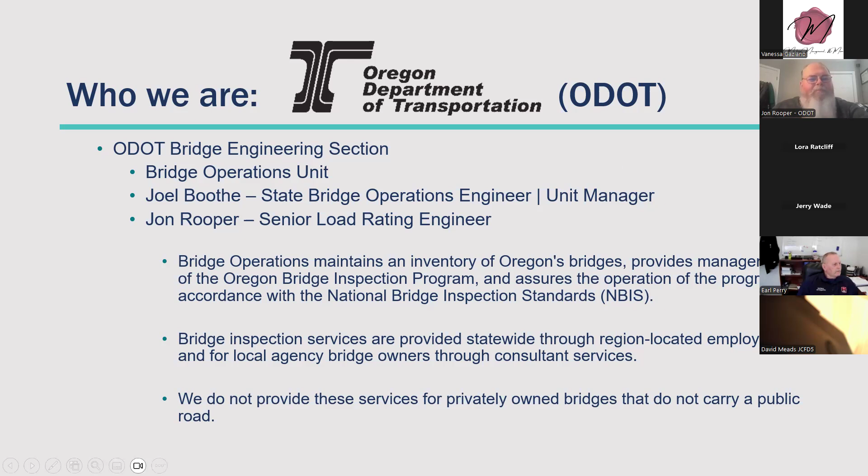So what we do is required by federal law. The National Bridge Inspection Standards are basically established for the safety inspection of highway bridges throughout the United States for all public bridges. This is basically required by the United States Code, which is the general and permanent laws of the United States. And a lot of that is prescribed in the Code of Federal Regulations, which is basically how to implement those laws and the interpretation of those laws. So a lot of what I'm giving here is basically right out of federal regulations and law.

So the first thing is, what is a bridge? That's what I'm concerned about and what we're required to look at. The legal federal definition of a bridge is law language, but the main thing that makes it what we're mandated to inspect and load rate is any structure that carries a public road and has a span length of greater than 20 feet.

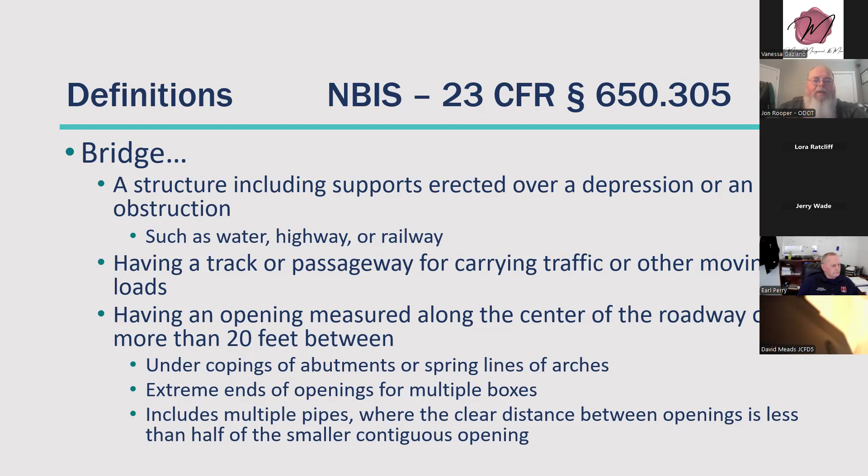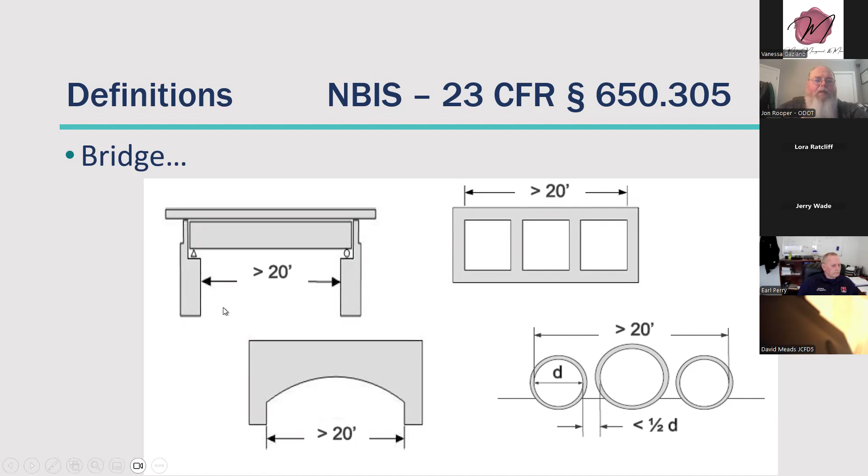To simplify this, looking at these diagrams, if you have a structure like in the upper left, if that span length is greater than 20 feet, or if it's multiple spans, if the outer edges of that structure and the clear distance of the span is greater than 20 feet, it's a bridge. Same way for culvert-like structures, like the other diagrams, which are buried structures. If the out-to-out opening of the structure, even multiple pipes, is greater than 20 feet, we have to treat it like a bridge. Those structures are inventoried, inspected, and load rated per federal regulations. This is just reiterating that culverts that are bridge length are included in the bridge inventory.

Structures that do not meet this National Bridge Inspection Standard definition of a bridge, we do not inspect them. We don't have to load rate them. So basically anything that's 20 feet or less or doesn't carry a public road is kind of unknown. We don't keep inventory of that. We don't look at their conditions. So I know there's a lot of private structures out there, and I know some fire districts, if the private bridge owners don't have the bridge inspected and load rated, a lot of fire crews won't cross it.

I've had some private owners contact me after the fact, upset that the fire crews didn't cross their bridge, and didn't know that that was even a requirement. And I have to do a little education, but it's not our responsibility. It's up to the bridge owners to provide that for their own bridges. So,

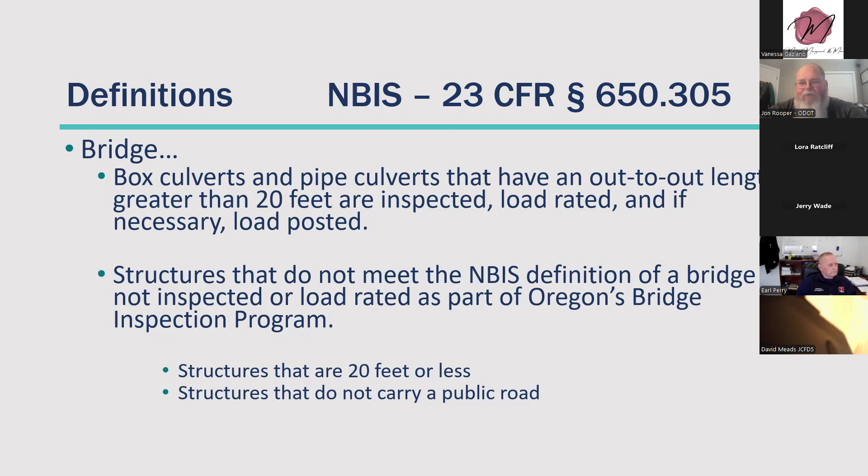a load rating. What is a load rating? Basically, it's the engineering analysis that determines the safe load capacity of a bridge to carry the vehicles, and that is supplemented by measurements taken out in the field and for the inspection to get the current condition of the structures. Because over time, structures do deteriorate, take damage, and everything else, and we have to incorporate those into the load rating analysis. That's different from a load posting.

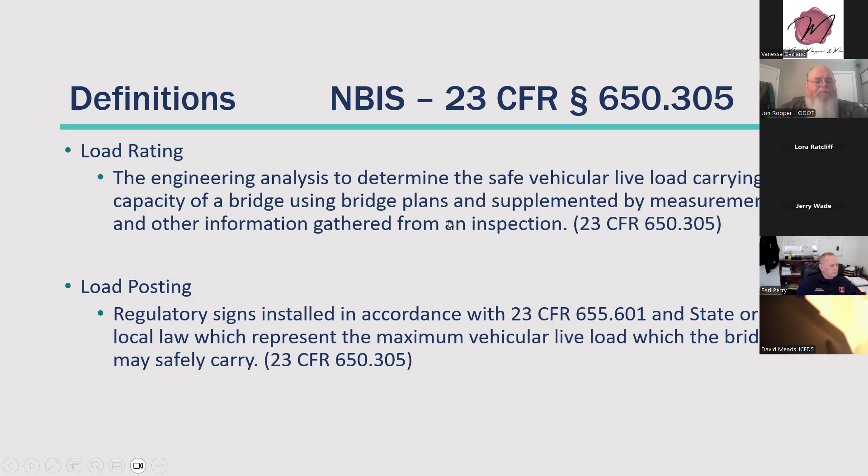A lot of people confuse a load rating and a load posting. The load posting is the actual signs on the structure that follow state and local laws here that basically list the maximum vehicle load that the bridge can safely carry. That is different from a load rating. The load rating is the analysis. The load posting is if it doesn't meet legal load limits, the bridge has to be load posted. And again, this is all citing federal law here.

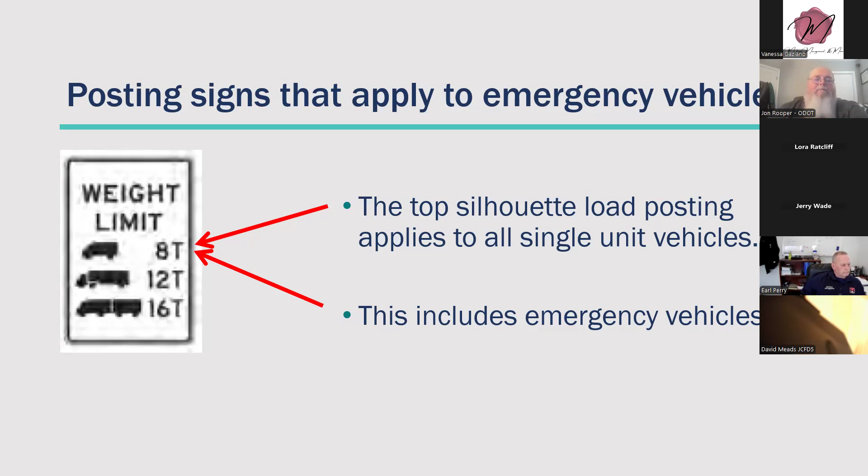The other two silhouettes: the middle one is for all tractor trailer vehicles. And then the very bottom silhouette is for all loaded trucks pulling a separate loaded trailer behind the truck. So, if an emergency vehicle meets one of those definitions, you'd most likely have to follow it, but I'm not aware of any tractor trailer or any vehicles that meet those definitions, but they might be out there. I'm just not aware of any.

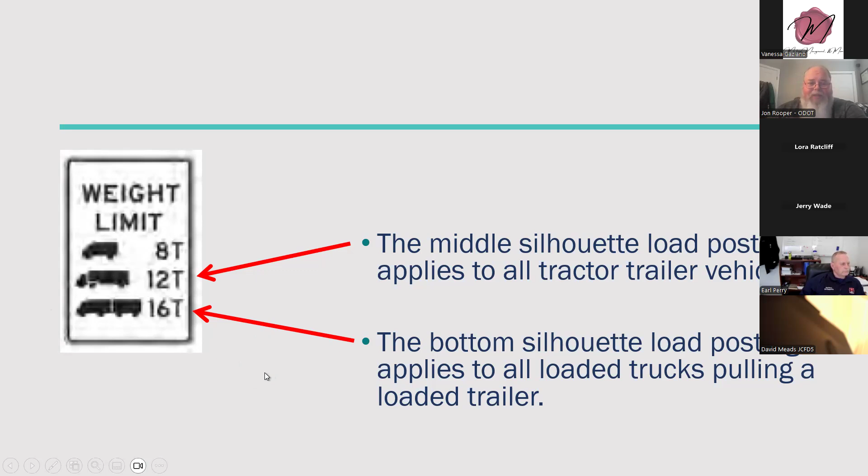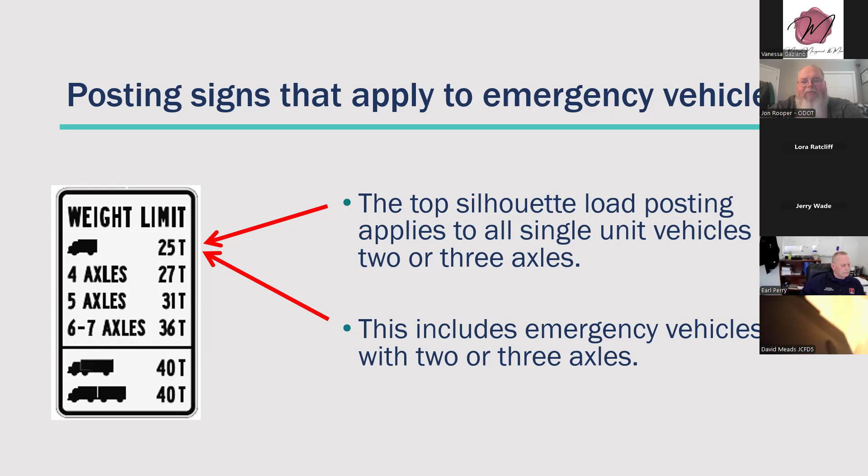So we also have signs here that look like this. The top silhouette again applies to all single unit vehicles with two or three axles, because you see below that top silhouette, we're listing four, five, six to seven axles, and I'll explain what those are in a little bit here. But the top load posting applies to all single units with two or three axles, including emergency vehicles. This next set of load postings applies to specialized hauling vehicles.

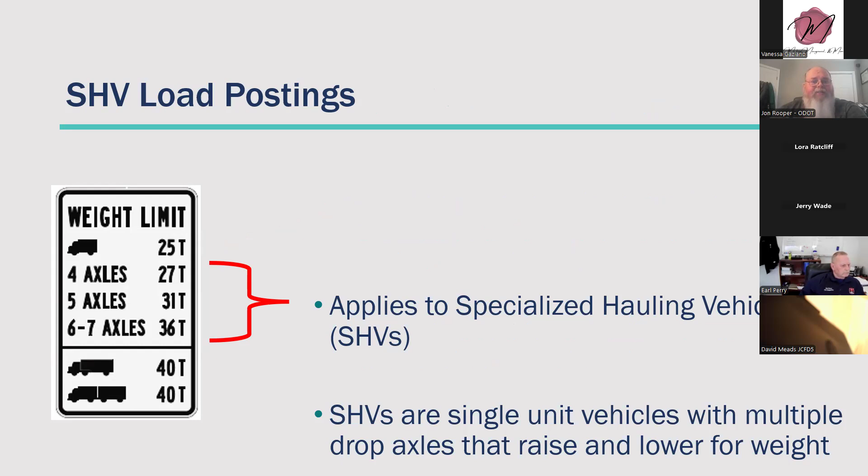SHVs are single unit vehicles with multiple drop axles that raise and lower for weight, like your modern dump trucks and concrete trucks that have these different axles that can raise and lower. Here's some examples of what those look like. A few years ago, they weren't as popular, but you usually see a lot of these near urban centers now for short range delivery type vehicles.

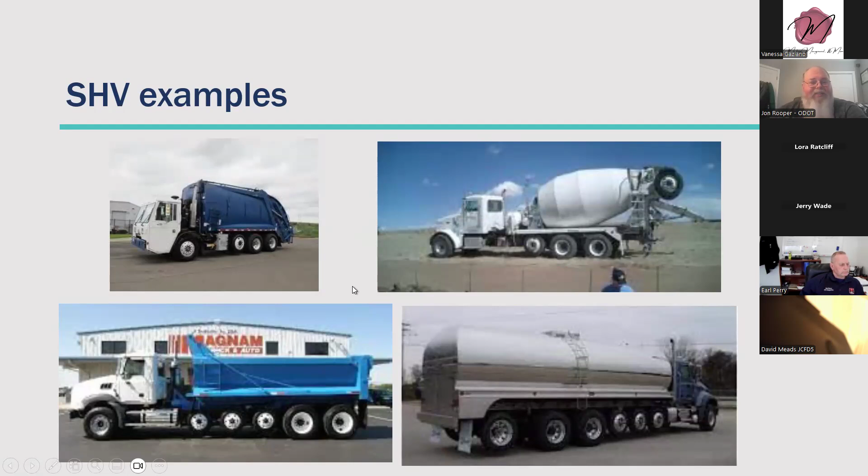Basically, we had standards for legal axle weights, and the industry was able to reverse engineer those laws to say, hey, if we add more axles to a vehicle, we can carry more weight in these shorter vehicles and still be considered legal. So that's how these things came around.

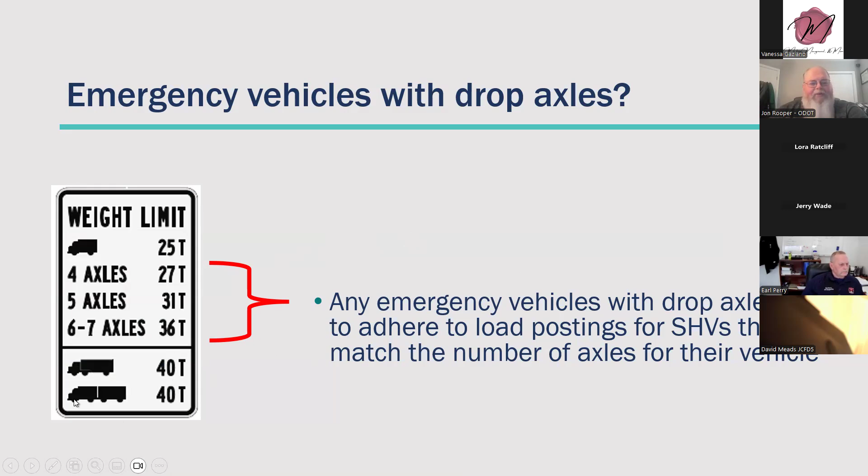If an emergency vehicle has these drop axles, then they need to follow the load postings for these SHVs, because that's going to be basically defined for that type of vehicle. I'm not aware of any of these in Oregon that are operating as an emergency vehicle, but if by chance there are, then they need to adhere to these load postings for that section of the load posting sign. And again, the bottom two silhouettes are like before, tractor trailers and loaded trucks pulling a loaded trailer.

Also in Oregon, we have several bridges that only require load postings just for the specialized hauling vehicles. And we've developed these different signs to post for either all the different SHV configurations or for whichever ones actually need to be load posted. So again, if an emergency vehicle meets any of these definitions and has that many axles with all the drop axles, they would have to adhere to one of these load posting signs.

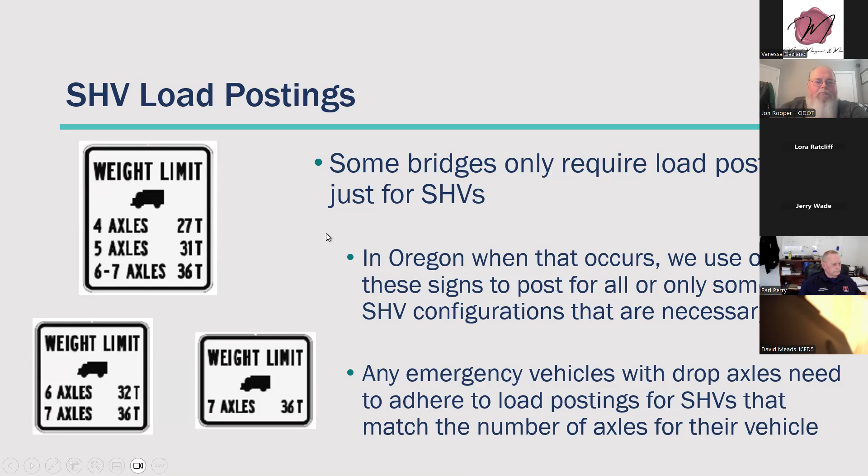And then we get into the FAST Act, Fixing America's Surface Transportation Act, which President Obama signed into law just before he left office. Basically, it made emergency vehicles that have heavier than legal axle weights be considered a legal vehicle on an interstate and within reasonable access to an interstate, which is defined as 1 road mile from an interstate. So basically what that required was any bridge that's on an interstate or within 1 mile of an interstate had to be load rated for these FAST Act emergency vehicles, and if necessary, load posted for them.

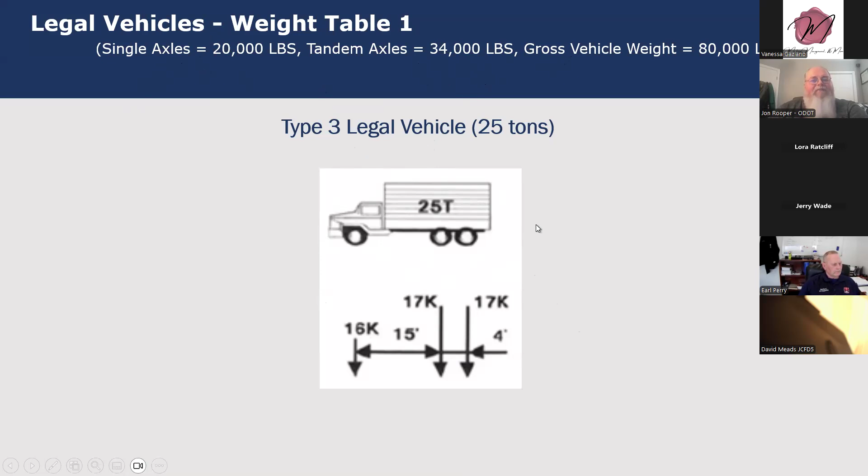This slide here is just a quick comparison of the single unit vehicle that we normally analyze in our load ratings. This is a 3-axle vehicle with legal axle loads. A legal axle load for a single axle is 20,000 pounds, and tandem axles have 34,000 pounds. And again, the top silhouette is what this vehicle is representing on those load posting signs. It's basically a 25-ton vehicle that we're analyzing because it meets those legal axle weights.

The FAST Act basically gave us two different vehicle models, a two-axle emergency vehicle, which is called the EV2. The front steer axle is 24,000 pounds, which is greater than the 20,000 pound legal axle weight.

Saw a question pop up here about clarifying what a ton is. 1 ton is equal to 2,000 pounds. So, like 20,000 pounds, that's 10 tons. So your legal axle weight for a single axle is actually 10 tons or 20,000 pounds. Tandem axles is when you have two axles closely spaced, like within 4 feet, usually the back drive axles. The legal axle weight of that tandem axle is 34,000 pounds.

This FAST Act emergency vehicle has a drive axle single axle weight of 33,500 pounds. That's almost the same weight as what a legal tandem axle is allowed. So the FAST Act allows for quite a bit more load to be applied to these emergency vehicles above what legal load limits allow.

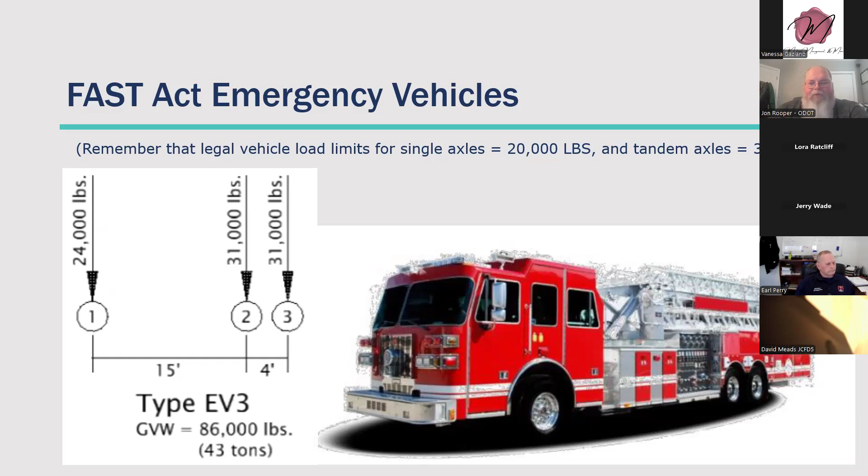Whoops, let me go back. Then the second vehicle model that they came out with was the EV3, which is a three-axle emergency vehicle. This is supposed to be representative of aerial ladder fire trucks. And this one, again, the steer axle is 24,000 pounds, which is heavier than legal, but that back tandem axle is now 62,000 pounds. That is a large increase over the 34,000 pound tandem axle, because normally each of those back two axles for a legal vehicle is only allowed to carry 17,000 pounds, and each of those back two axles on this model is allowed to carry 31,000 pounds. That is a very large concentrated load over a very small footprint.

Expanding on that, those last two axles being 62,000 pounds is the same as the entire gross weight of this five axle dump truck, which is a five axle SHV. The diagram below the dump truck shows the legal axle weights for those different drop axles and the permanent axles. And that 62,000 pounds for that dump truck is spread out over 22 feet, where that same concentrated load is just placed within 4 feet on the emergency vehicle.

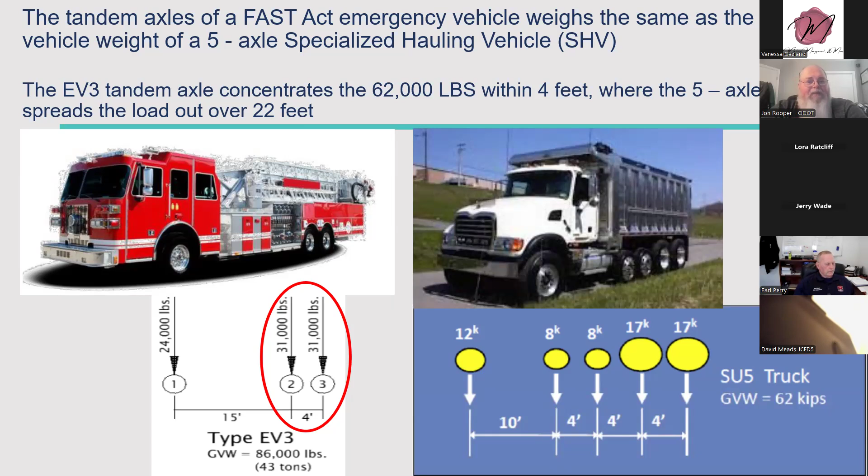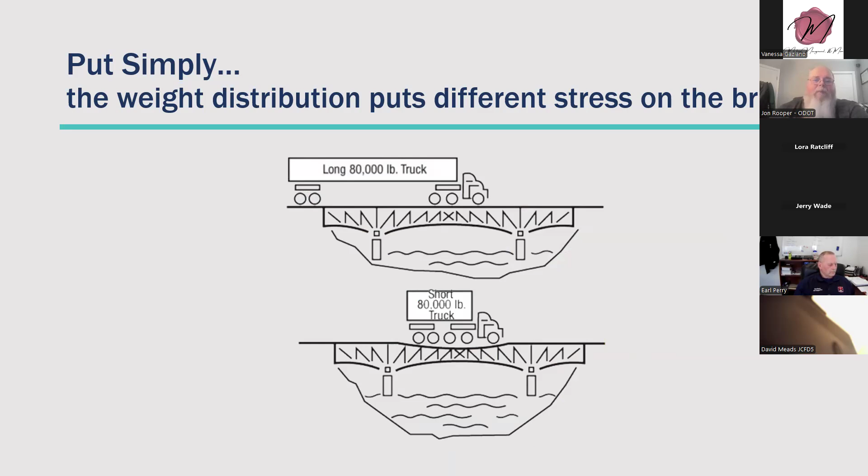So, why are we focusing on emergency vehicles with that? Looking at the history of most of the bridges that have been built in the state of Oregon between the 1930s to 1990s, from the 30s and 40s, the design vehicle, this upper left vehicle, is a 15-ton two-axle vehicle, and that's what was used for all bridges that were designed between the 1930s and 40s.

And we still have a lot of bridges in the state, especially on the highway system, that were built to that criteria. Then from the 1940s to the 1990s, the design standards changed and they used a three-axle truck represented by this diagram here that was 36 tons. So now the three-axle emergency vehicle is 43 tons, a lot heavier, plus that back tandem axle has a concentrated load that's significantly higher than what a lot of the bridges were even designed for.

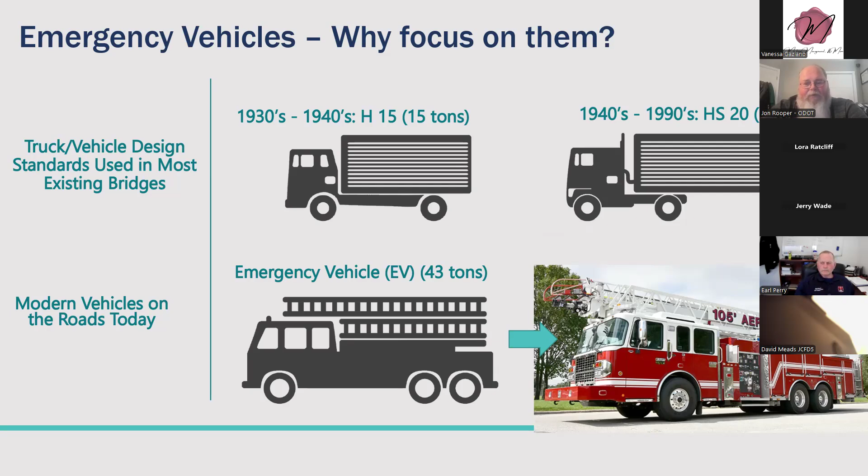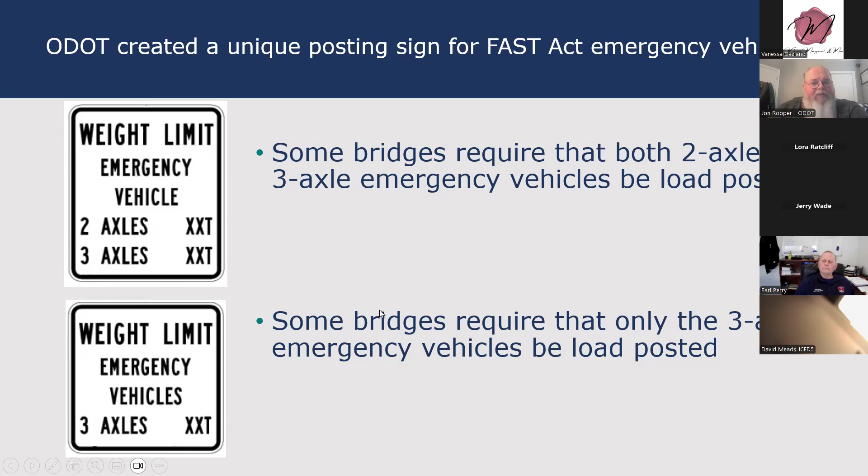So since the FAST Act required us to load rate and post for these vehicles, in Oregon we created these two signs because some bridges required that both emergency vehicle models had to be load posted on or near the interstate. And some bridges, with that really heavy tandem axle of the three-axle emergency vehicle, only need the three-axle emergency vehicle to be load posted. So that's why there's a difference between these two signs. And again, we started using these signs on all state and local bridges within a mile of an interstate.

Some question why the emergency vehicles can be so much heavier than a normal legal vehicle. It's because with legal vehicles we're often looking at multiple lanes loaded, and the distribution of multiple lanes loaded of those trucks requires a lower posted weight. Whereas for emergency vehicles, federal law has dictated that we only need to analyze a single emergency vehicle crossing a bridge at a time during an emergency situation. So that's why the two-axle and three-axle emergency vehicles have a higher load posting than the other legal vehicles. Hopefully that makes sense.

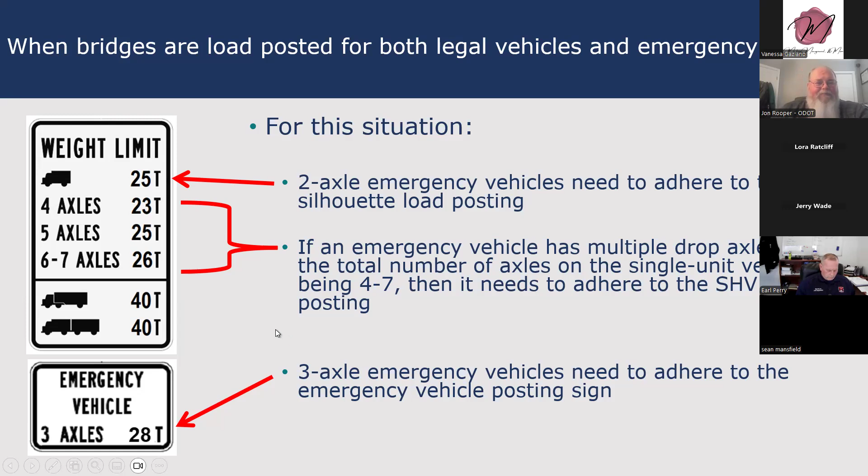But there is currently a bridge out there that's posted this way. And based on the interpretation of our enforcement folks, this is how emergency vehicles should be following it. So I kind of threw this as a one-off out there as an example of, hopefully this isn't making it too confusing, but based on how signs are posted, this is how the enforcement folks expect it to be adhered to.

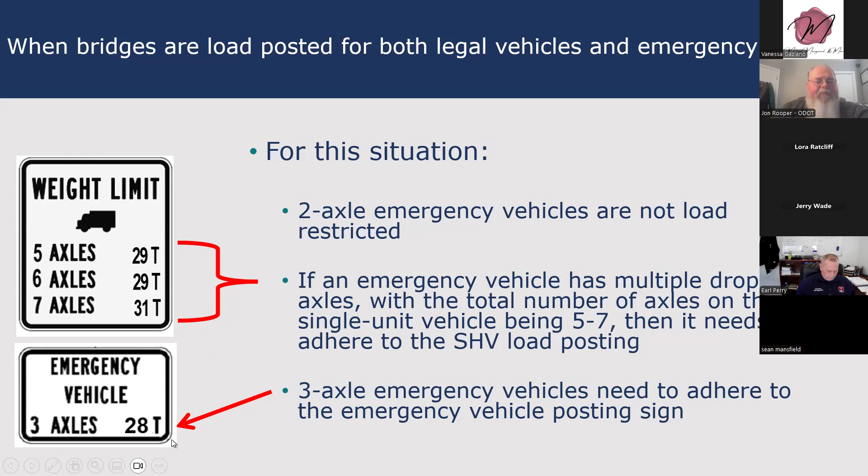And so basically the question comes, what happens if or when an emergency vehicle becomes or matches a specialized hauling vehicle? Most of the load rated emergency vehicles with drop axles, do they have heavier than legal axle weights? Most of us would think no, because the whole reason of having drop axles is for that truck to be allowed to meet legal axle weights. But is there anything stopping it?

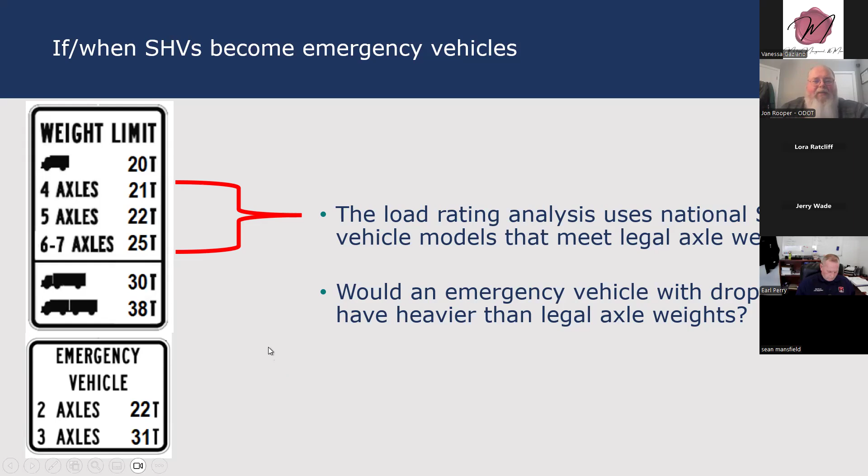So I don't know what rules or how they're being applied. If they just say, hey, per FAST Act, we can have heavier than legal axle weights. I'm not sure if there's an actual equation in there that tells them what those weights can be, but they're getting away with it down there for this. I don't know if we have any of these types of vehicles in the state of Oregon. I know my manager's hoping we never get anything like this, and I kind of agree, but it puts a lot of load on bridges with these concentrated loads.

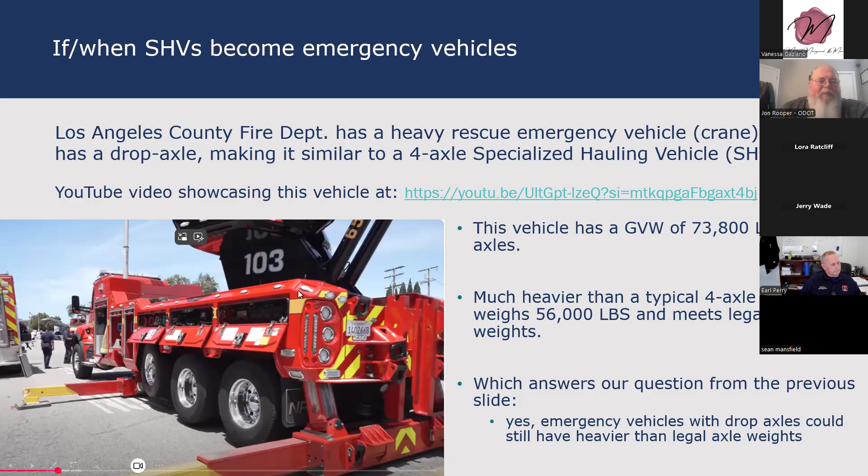So, going back to the FAST Act, again, this made these vehicles legal on the interstate or within reasonable access of the interstate. So we're required by federal law to load rate and post for these vehicles on those bridges, as I stated previously. But what about the rest of the bridges that are farther from an interstate? I mean, these vehicles don't magically grow wings and fly away. There's really no requirement federally that says we have to look at those. It's basically up to each state to determine how we handle those for those bridges away from the interstate.

So, per special permit, these vehicles are allowed to operate within Oregon. Unfortunately, our motor carrier or Commerce and Compliance Division has kind of dropped the ball in the last few years, and hasn't really enforced a lot of the fire districts to get the permits for these vehicles. So we really don't know how many of these vehicles are operating here in Oregon. I think our Commerce and Compliance Division is working on rectifying that and doing outreach and getting these vehicles permitted and weighed and everything so we can know how many are in operation.

But as of a couple years ago, they were telling us they didn't have an actual count of how many of these vehicles exist. Our Commerce and Compliance Division and ODOT upper management was planning to expand the same criteria as the FAST Act to all bridges within the state, to basically all public roadways, making them be considered legal statewide.

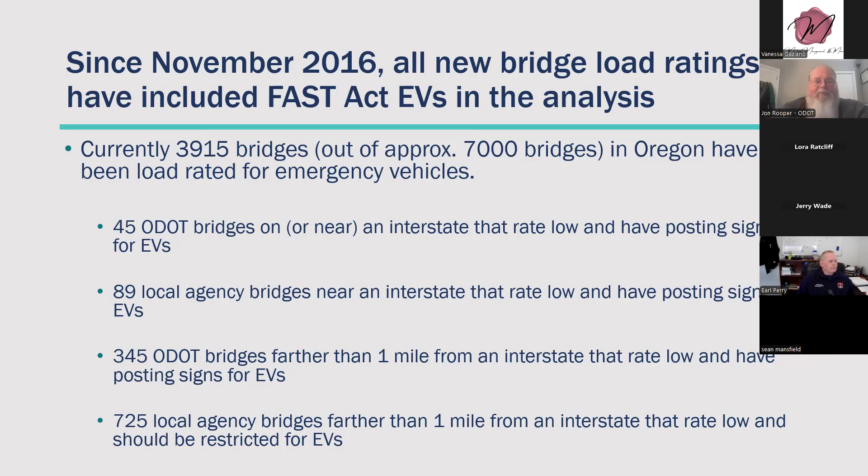To help mitigate some of this in the future, we've added the three-axle emergency vehicle to the Oregon Bridge Design Manual. So all new bridges are being designed with this vehicle, and any bridges that require strengthening for legal or permit trucks also have to make sure their strengthening designs pass for this three-axle emergency vehicle as well. So hopefully in the future we'll have fewer and fewer bridges that may end up rating out low because we're designing for these vehicles now, where never before were these load effects looked at when we were designing or strengthening bridges.

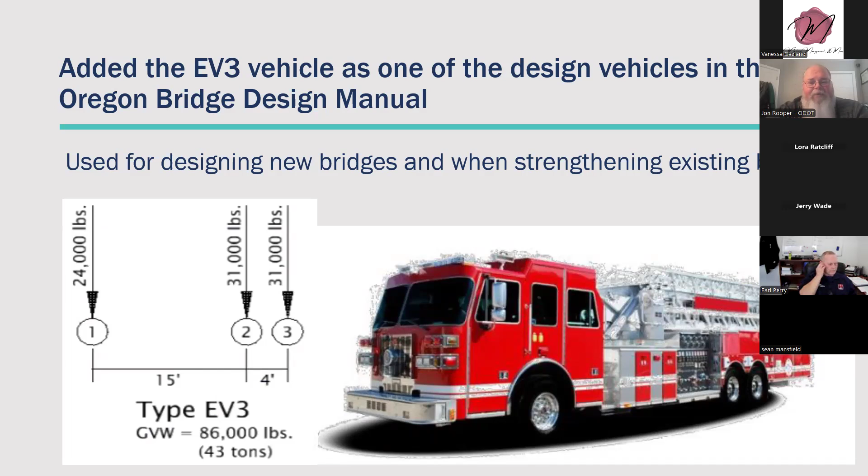And with that, that is the end of my presentation. If there are any questions.